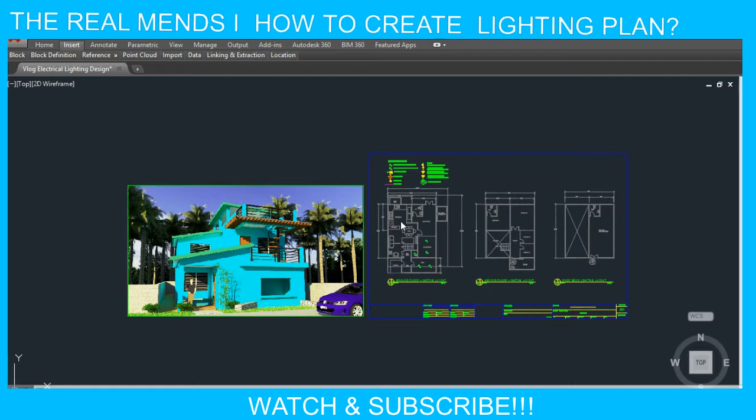This moment, we will do how to create an electrical lighting plan. So, kung anong gumawa ng plano about sa lighting. So, this is our perspective. This is two-story with roof deck and then meron siyang terrace. And then we have floor plan for the ground floor, and then second floor, then roof deck.

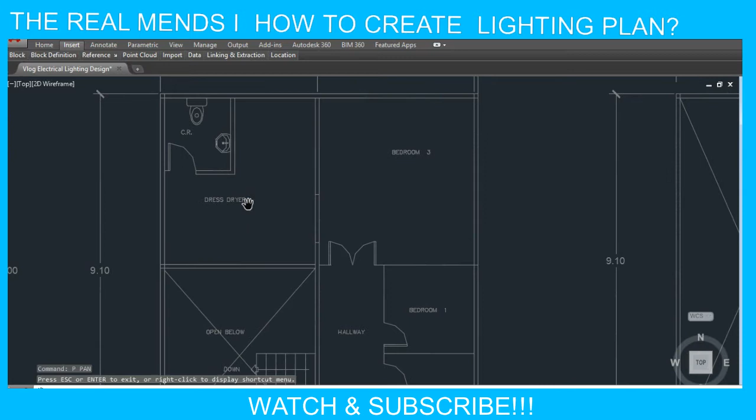So for ground floor, meron tayong store, tambayan sa labas, future bedroom, living area, dining, laundry, we have kitchen, we have CR. For second floor, we have terrace, bedroom 2, bedroom 1, bedroom 3, we have hallway, then dress dryer, CR. And then for the roof deck, we have open area for improvements, and then CR.

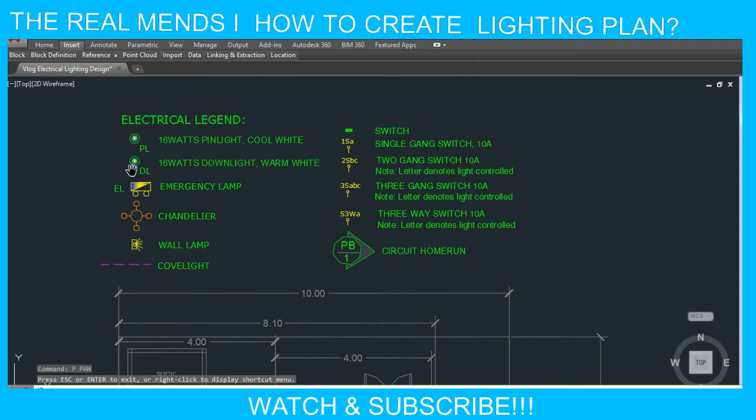So itong plano na to is gagawa natin ng lighting layout. And then before that, meron tayong legend. So pag merong ceiling, lalagyan natin ng pin light, 16 watts. And then, pag walang ceiling, lagyan natin ng downlight. And then, meron tayong emergency lamp, chandelier, we have wall lamp, we have cove light, we have switch, 1 gang, and then 2 gang, and then we have 3 gang. We have 3-way switch, and we have circuit home run.

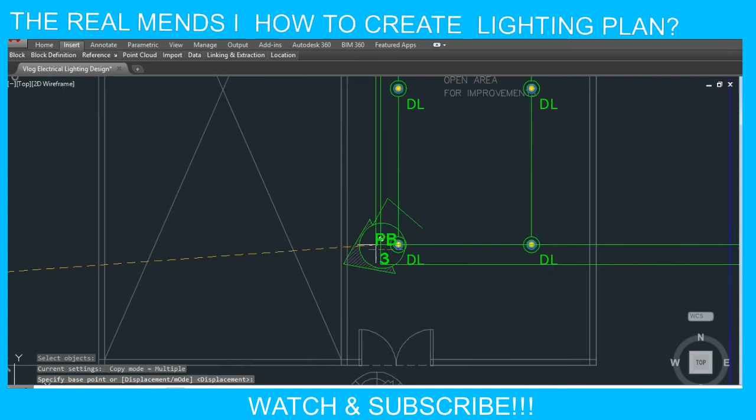Okay, so we're done on assignment of lamps. So, mabilis lang. We have 4 circuits. We have 1, we have 2, 3, and then 4. So, again, for now,

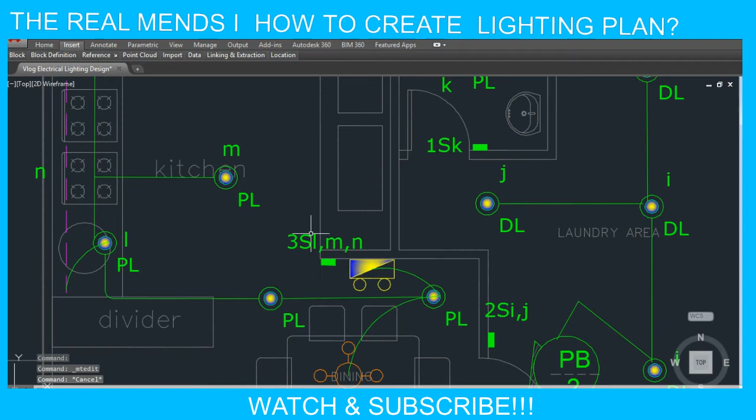Okay, that's it. We're done already with this ground floor for the assignment of switches. What we do for now is move to the second floor, how again to assign switches. Our last alphabet was L, M, N, we have here O.

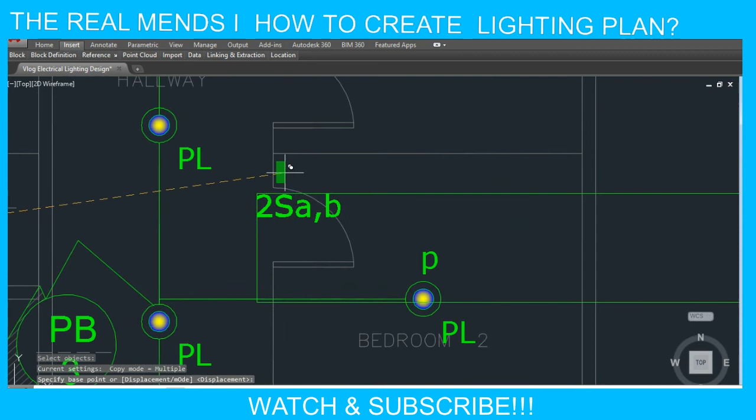O, and then we have here, this will be P. It's just one light, then this is also just one switch. So designing electrical layouts is quick as long as you're familiar with the technique. This one is P. It's only hard if it doesn't suit you, I mean if you haven't mastered it.

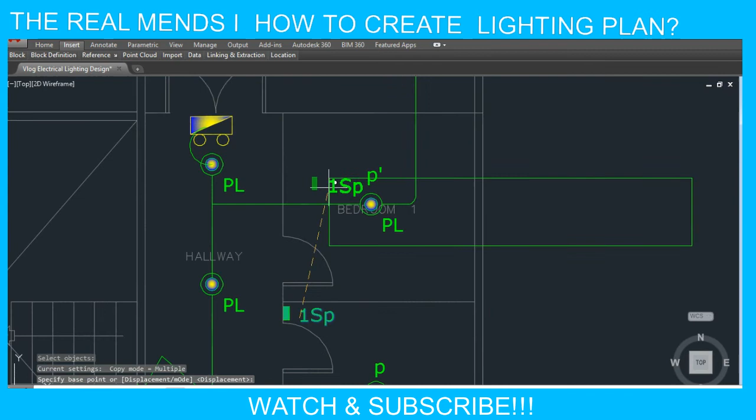And then for the bedroom too, just one light. Can we see this as P prime? So let's copy it. This is again your P prime.

And then for the third bedroom, P, can we assume this is Q? And then this is Q. This is R, or can I have this as bandang R, and then this one at the side. Can we see this is S? So Q, R, S. Therefore, the switch we'll place is a 3-gang.

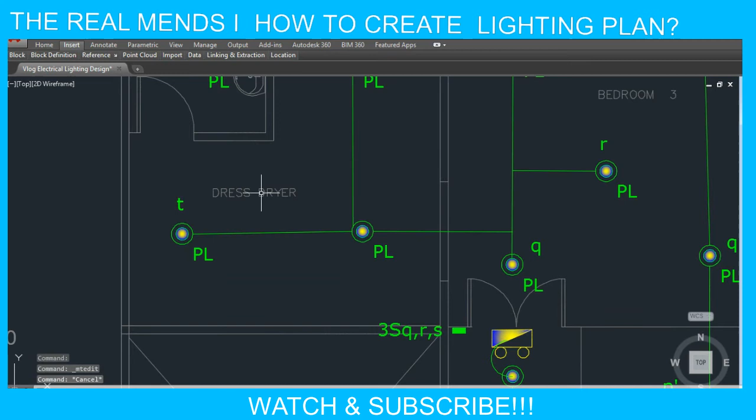We have here Q, R, and then S. Q, R, S. And then for the dryer area, actually it's just three. Q, R, S, this is T, and then this is T. Can I say this is U? T, U, V - let's just use U so it doesn't all turn on together, so we can save on electricity.

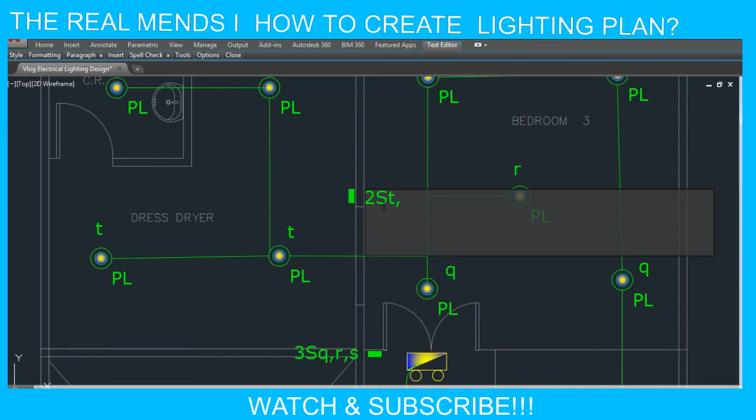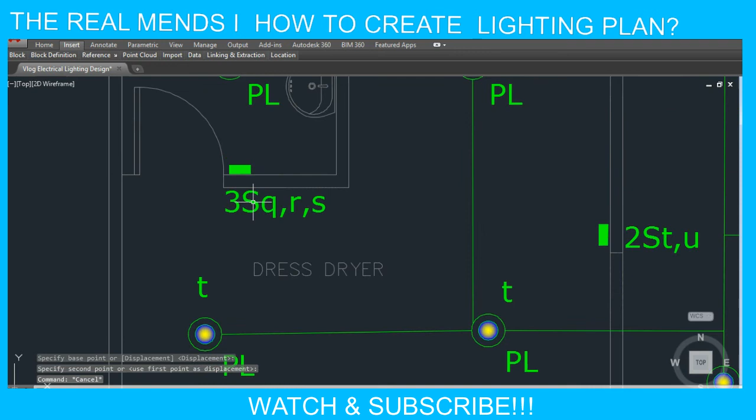Sir, can I also use numbers? Okay, you can also use numbers. So for the third circuit, for the third floor, can we use the number? This 1S, we have here P.

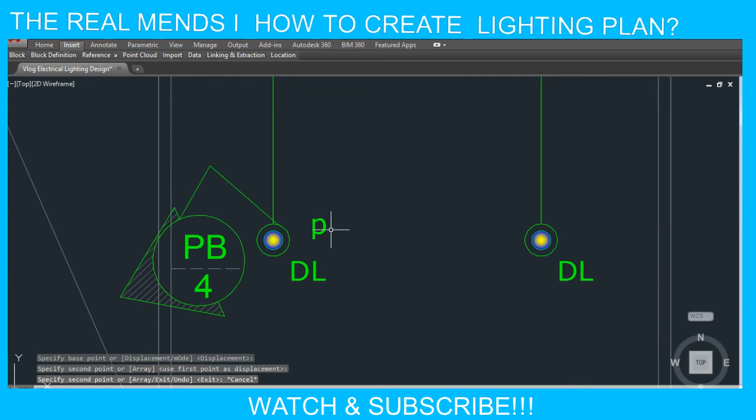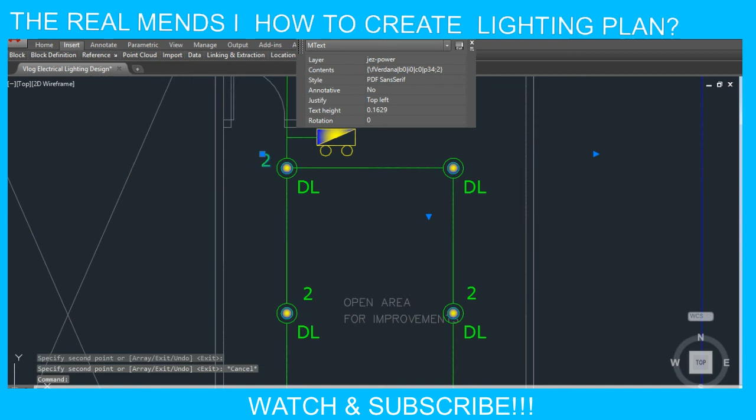Can we see this is 1? We have this 1. This is 2. And then this is 2. For the bottom, can we see this is 3? And then for this one, can we see this is 3? And then for the CR, can we see that this is 4?

Okay, for the CR there's only one lamp, so let's just put one switch. And then can we see this is 1S4. Okay.

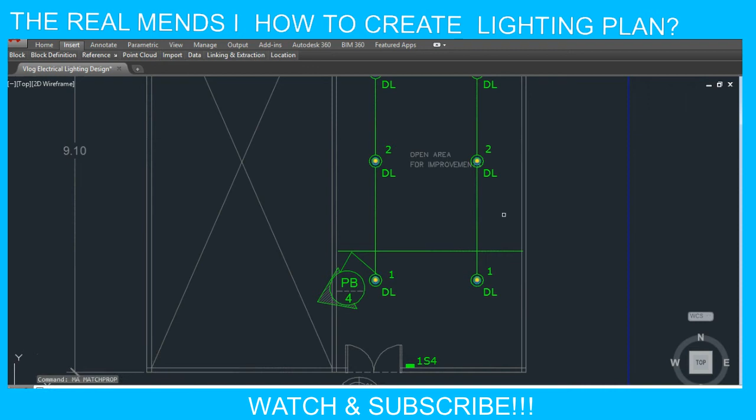Okay, so this is 3S. We have 1, 2, 3. That's it. 3S, 1, 2, 3. Okay.

Our concern now is, how about for the stairs? Because sometimes we're too lazy to go down. Okay, can we have this - this part still has a pin light. This is for the light of our stairs. Can we assign this as X?

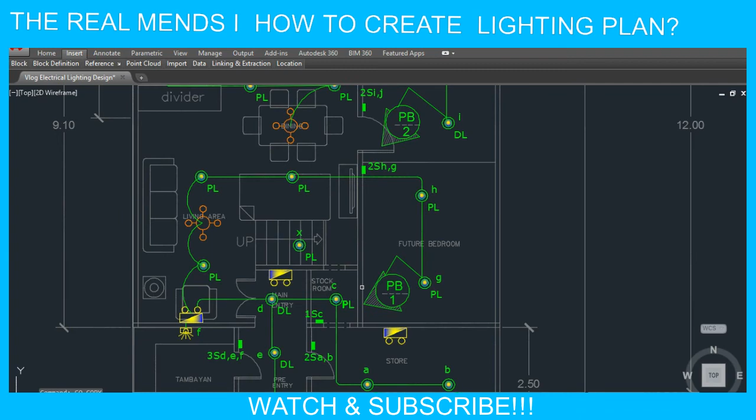So bago ka umakyat ng pintuan, dapat may switch ka na o may ilaw na. Kahit dito lang sa before mag-step. This is 1S X. At pag-akyat mo ng second floor, dito ka na umakyat ulit. So dapat di ka na bumaba para patayin mo ulit.

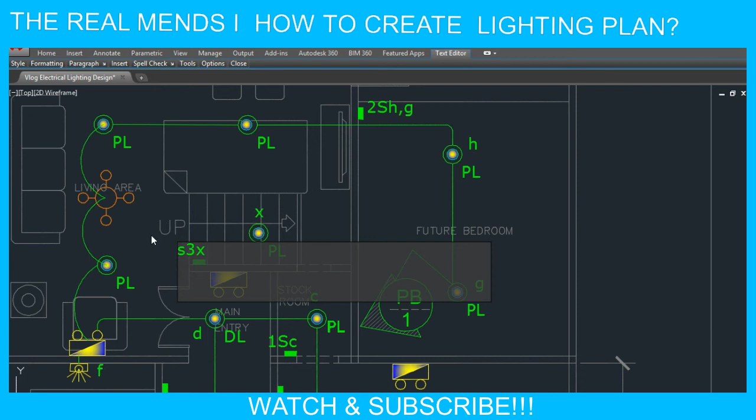What we need to do is i-convert natin ito to 3-way switch, S3Wx. That is the symbol, 3-way siya na switch. Ang ilaw niya kino-control is yung X lang.

Pagdating niya sa taas, pagdating mo ng second floor, itong W na naman yung pailawin mo para may mailaw ka sa hallway. So therefore gusto mo na ulit patayin yung switch sa ground floor, sa stairs. Ano ang kailangan gawin, meron siya ulit 3-way na para doon sa switch na yon. At ito na siya. So this will be 3-way X, at ito naman ang para sa hallway mo.

Let's review. Pag-enter mo ng stairs, akyat ka, mailaw ka na, on mo na to. So pag sa taas ka na, gusto mong patayin, dito mo na siya patayin sa X. Ito is S3Wx, so off na.

And then pag umakyat ka na naman ng terrace, pagpasok mo ay pailawan mo to. At paakyat mo, dapat di ka na bumaba para patayin yung ilaw. So ang kailangan gawin, itong tugang na switch na to, i-convert natin siya ulit sa 3-way.

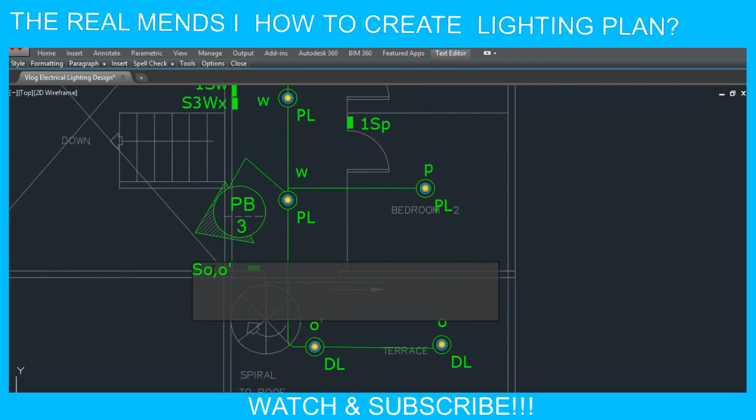So this is S3W, we have O, O prime o tugang na 3-way switch. Yun yung term niya, tugang na 3-way switch. So ito na yun, at akyat mo lang taas, step ka na.

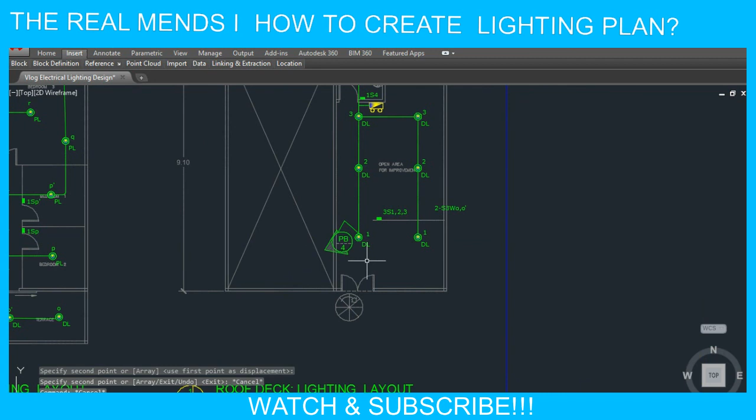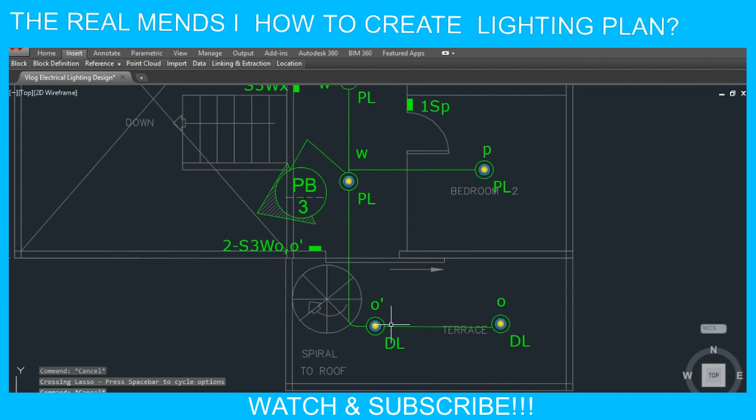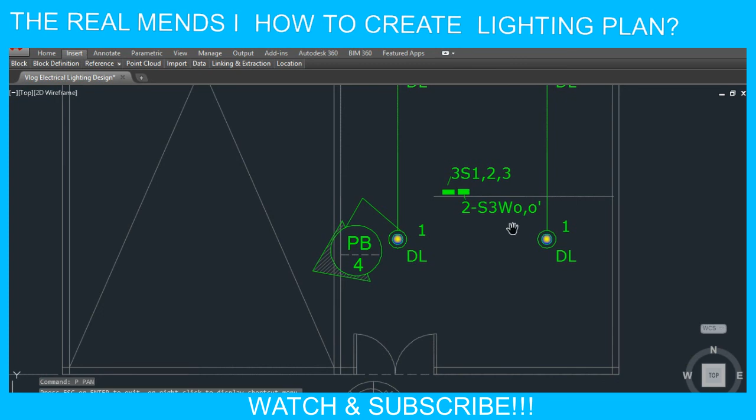Pagpunta mo ng taas, dito ka na, naka-enter ka na, naka-landing ka na sa roof deck. So di ka na pwedeng bumaba para patayin ulit. Ang kailangan gawin ay i-turn off lang itong switch to S3 O prime. So ganun ang pag-bawas ng 3-way switch. Di ka na pwedeng bumaba. So it's dual purpose, pwede ka makatipid ng kuryente.

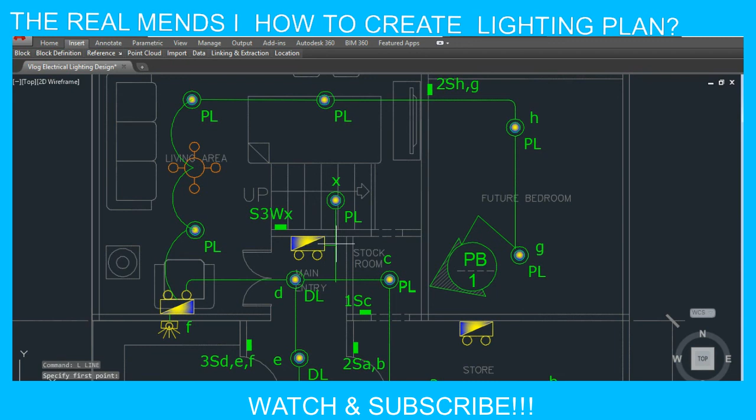Otherwise pwede rin convenient ka dahil di ka na mahahassle. Since itong ilaw sa stairs ay only additional, pwede siyang itap lang sa nearest na circuit. So sa circuit 1 siya mabibilang, together with itong emergency light, yan i-tap sa pin light na yan. At meron tayo ritong isa pang emergency light na i-tap din sa nearest.

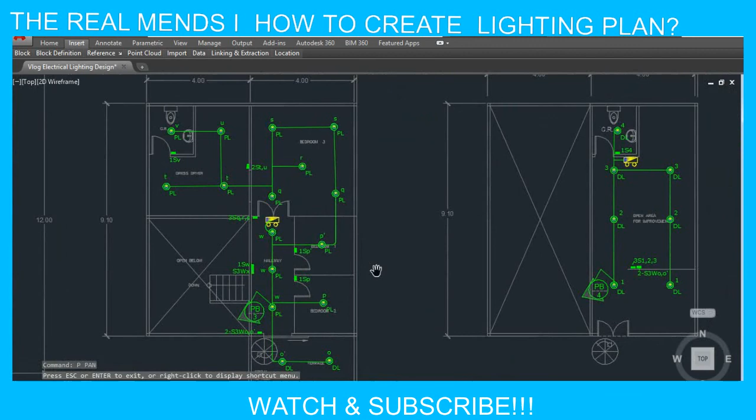Okay, let's review kung meron pa tayong na-miss na mga circuits, na mga fixtures na wala pang circuit. Let's review. Okay, it's almost complete. Very good.

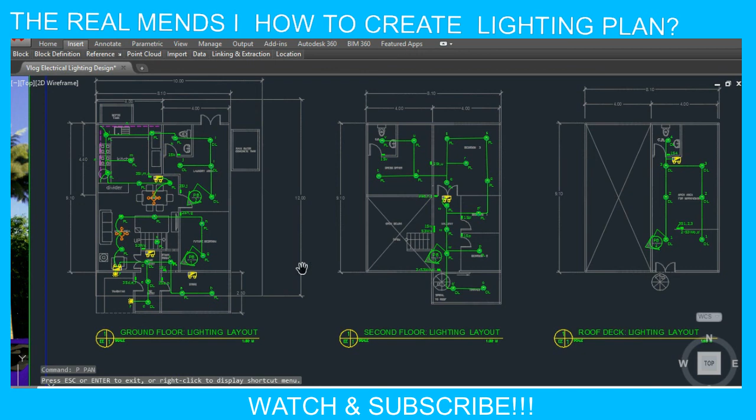So again, for this time, natapos na tayo sa part ng lighting layout. Ito yung ating perspective. We have 2 floors plus roof deck. Yung ground floor ay living area, kitchen. For the second floor, it's almost bedroom and terrace. For the roof deck, you have a deck para doon ka magtambay or magpahangin sa taas. Nandito yung ating lighting layout. Madali lang siya, mabilis mo lang siyang makakabisaduhin dahil it's common lang. Kailangan mong familiarize anong ilaw ang gagamitin, saan ka pwedeng mag-switch, anong type ng switch, and the application.

Okay, we are now done with this lighting layout plan. So for the next video, power layout naman tayo - paano yung mga outlets, aircon, at how about the ref. And then about load schedule, paano gumawa. That will be our next video.